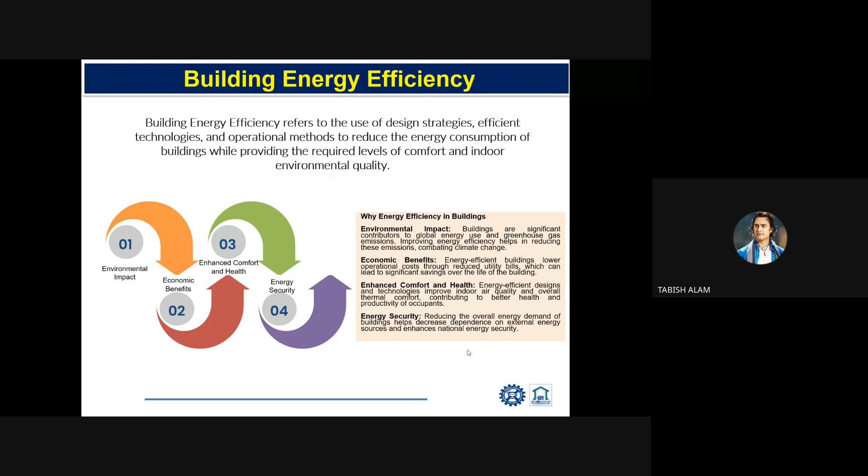The fourth one is energy security, which relates to the overall energy demand of the building, helps decrease dependence on external energy sources and enhances national energy security. That is, how we are taking energy from the external source, how we can generate energy in the building, and utilize the same. So these are the four parameters which are very important to consider in designing buildings.

So you can see in residential buildings there is a 5% increment. In commercial and commercial office there is 8% in energy consumption. In hospitality, like hospitals and hotels, there is a 10% rise. So these are the trends. Day by day we are constructing more and more buildings, so this trend is going to increase.

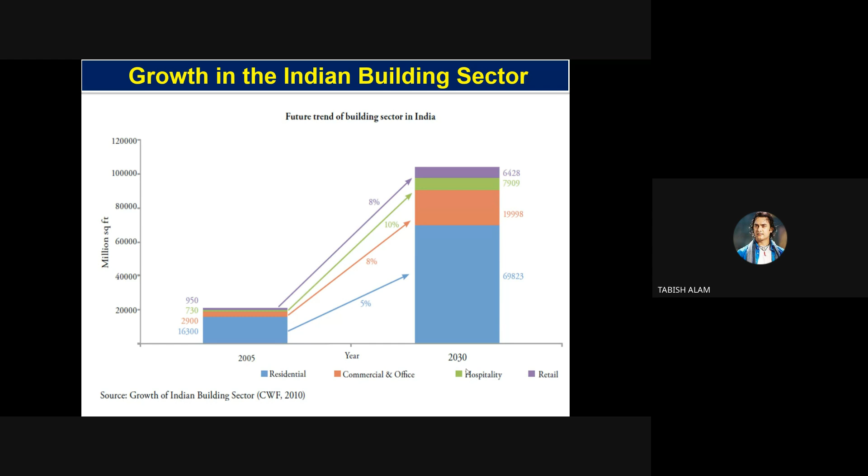So basically, what we have to consider for designing the building is that it should have low energy or be a net zero building. So first, we will try to reduce the heating demand, reduce the cooling demand, reduce the energy use of the lighting, reduce the energy use for heating water, good housekeeping and people solutions, reducing the energy requirement for ventilation. These are some parameters which can help us to reduce the energy consumption in the building.

So heating demand: how we can reduce the heating demand, how we can reduce the cooling demand, how we can reduce the energy for the lighting, how we can reduce the energy for heating water. So these are some passive measures that we can implement in the design of the building. This can reduce up to 40% of the energy demand by using these parameters.

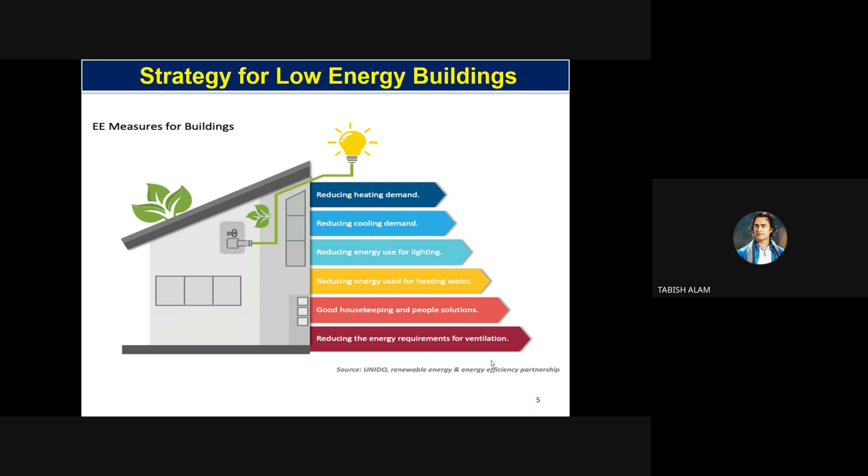So in the next slide, we can see that energy efficiency mainly depends on passive technology and active technology. In passive technology, we have shown in the previous slide that most of the parameters are passive and can be considered in the design of the building. Passive, like the building envelope, should be such that it cannot transfer heat from the building to outside or outside energy into the building. The passive term refers to the isolation of the building from the external environment, so energy does not escape from the building to the outer environment or from the outer environment to the building.

And active technology involves using energy to save energy, such as through mechanical systems, technology-driven solutions, or integration of renewable energy. In active technology there is other equipment like efficient HVAC systems, efficient lighting systems, other efficient systems, and the energy management system in the building. So these are the active systems.

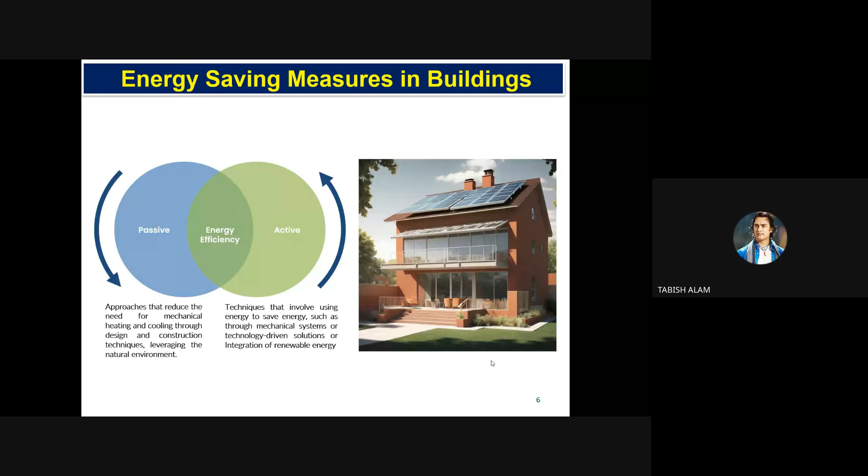So we can see the energy saving measures in the building. In the energy saving techniques, the building envelope design is the most important. We have to isolate the indoor environment of the building from the outside, so there is proper insulation in the walling and roofing so energy does not escape from the building to outside and outside energy into the building. Second one is the heat storage system. Whatever heat we are generating in the building can be stored, and used when we have no energy. Then lighting design: the lighting design should be such that we can use natural daylight in the daytime. So these are the passive technologies where we can reduce the energy demand of the building.

Other parameters for passive sustainable design are the building geometry, natural lighting, natural ventilation. Apart from this, cool roof, orientation of the building, window sizing, window orientation, whether we have to put the window on the north side, south side, east side, or the west side. These are the critical parameters which can reduce the energy demand of the building.

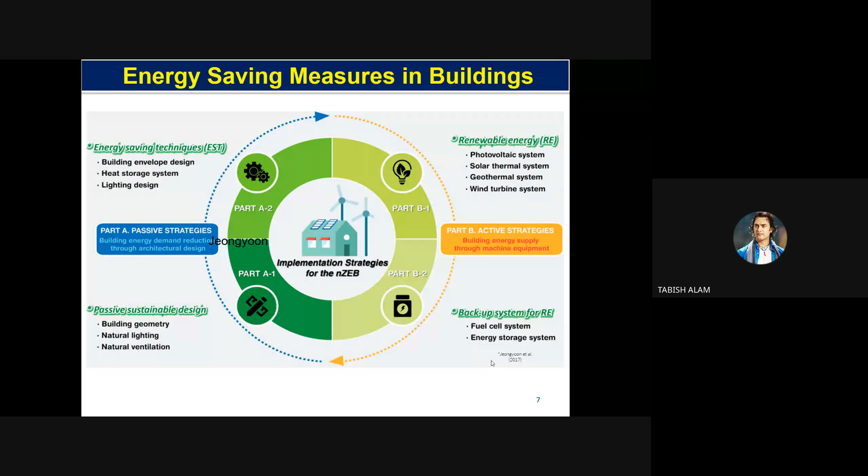Now the active strategies that can be integrated into the building, like photovoltaic systems that generate electricity utilizing solar energy, or solar thermal systems that use energy from the sun, geothermal, wind turbines. These are active technologies. And fuel cells that can be used to power the building, and energy storage systems. These come into the category of active strategies. So basically, the terms that are now coming into the news a lot: green building, net zero building, net positive building.

These are similar but there is a slight difference. A green building achieves balance between the energy it consumes and produces, resulting in net zero energy efficient and renewable energy building. Green buildings produce some energy using solar technology, wind technology, biomass, and also implement passive parameters into the building design.

A green building may be of two types: net zero building or net positive building. Net zero buildings are those which generate the same amount of energy which is utilized in the same building. So what we produce, we utilize in the same building.

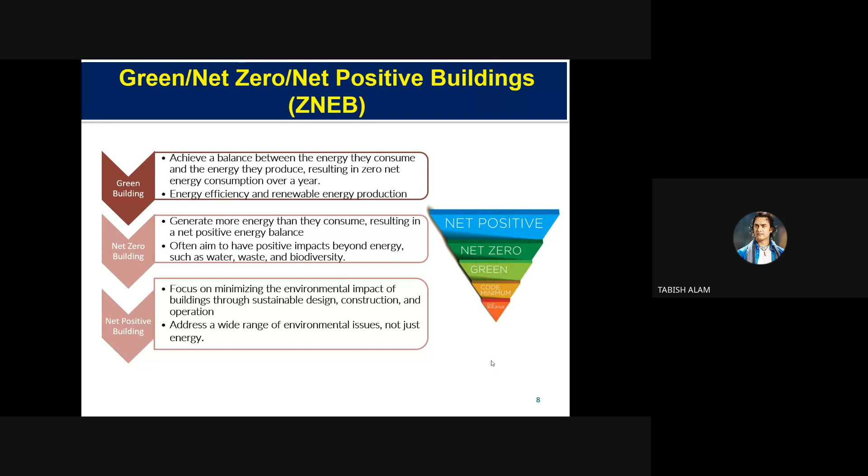Net positive means the energy produced is more than what is required in the building. Suppose consumption in the building is 100 watts, so we are producing 150 watts - producing more than the consumption. These are net positive buildings.

Now there are various parameters considered in designing a building. The first category is passive strategies. There are a number of parameters considered in designing the building. First is building massing, which can absorb solar radiation and not pass it to the indoor environment, thereby keeping the building cool. Solar energy does not enter the building, and a lot of energy can be absorbed in the walling also.

Solar orientation plays a very important role in designing a building. It involves designing the orientation of the windows so there is no direct sun radiation, which is important in summer when energy enters the building, but the same window orientation is desirable in winter when we need solar radiation into the building. Third is the building envelope.

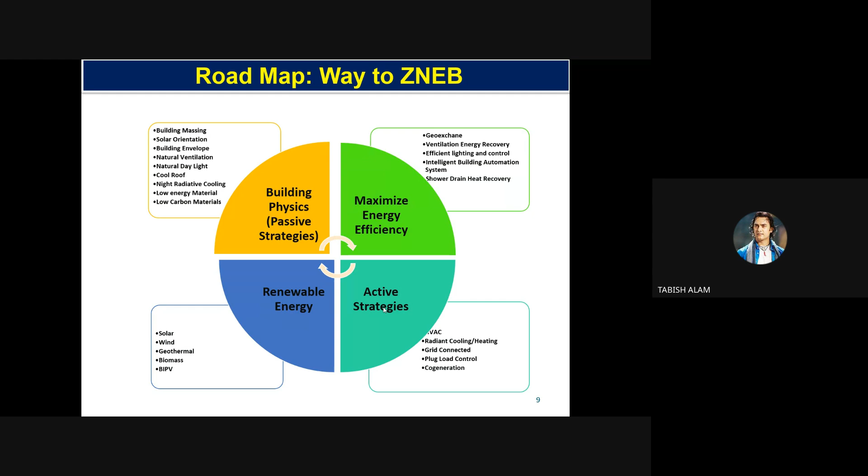These are the most efficient systems which can reduce energy consumption, and after that we can use active strategies for the remaining energy consumption: HVAC, radiant cooling and heating, grid connection, plug load control, and cogeneration.

In the passive strategies, we discussed passive solar design, orientation, window placement, and shading. Orientation we have discussed. Window placement is one of the most important parameters which can allow solar radiation to enter the building. The window should be designed so that it does not allow heat to enter the building, but it can allow natural daylight.

That is the most important. The third one is the shading device. That shading device can be used to reduce the direct solar radiation into the building.

Now the building envelope insulation, air tightness, double or triple glazing can be used for natural daylight, natural ventilation, cross ventilation, stack ventilation, ventilation tower. These are the ventilation strategies to be adopted into the building to reduce the heating or cooling load.

Thermal mass material selection is the most important. Floor and wall design, shape and layout of the building also plays an important role. Compact design should be there.

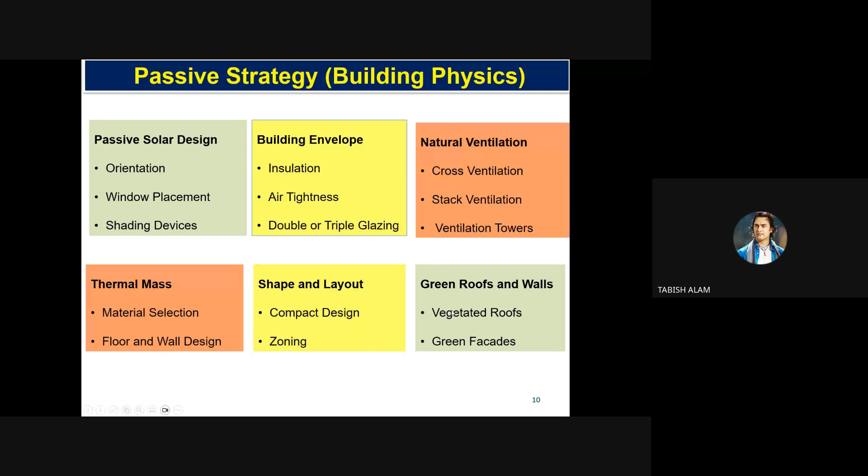Green roof walls - that is the vegetated roof, green facades. Other technology such as cool roof or reflective layer on the roof can reflect the solar radiation. So these are some strategies shown in this picture.

In the passive house there is a double or triple window which can allow visible light into the building but heat cannot cross this window. There is thermal insulation on the wall so it does not allow heat from outside to inside, or inside heat to the outside.

So these strategies can reduce the energy consumption into the building.

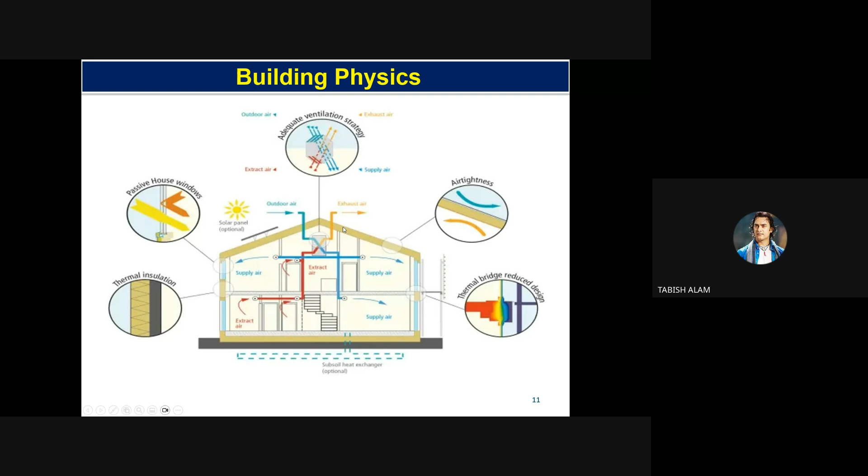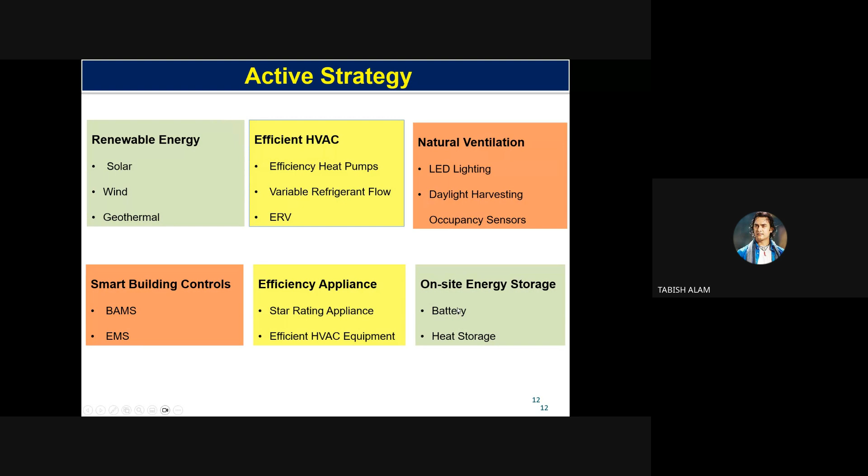There are also energy appliances that can be used, like efficient 5-star ACs, efficient HVAC equipment, and there is an option in active strategies for on-site energy storage in batteries or heat storage, so we can use this energy into the building when there are no other sources available.

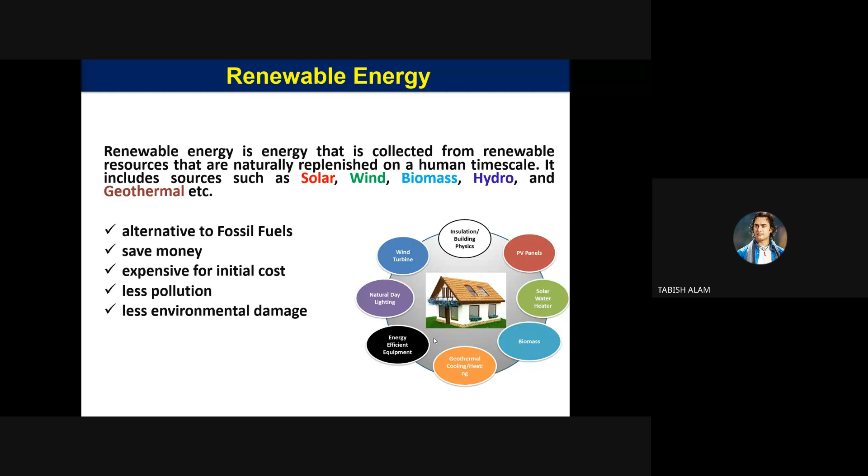So by considering all the parameters like building physics, passive parameters, active parameters, we can design a building that will be a net zero building, or even a net positive building, so we do not require any energy from the outside. What we are generating, we can use the same amount of energy.

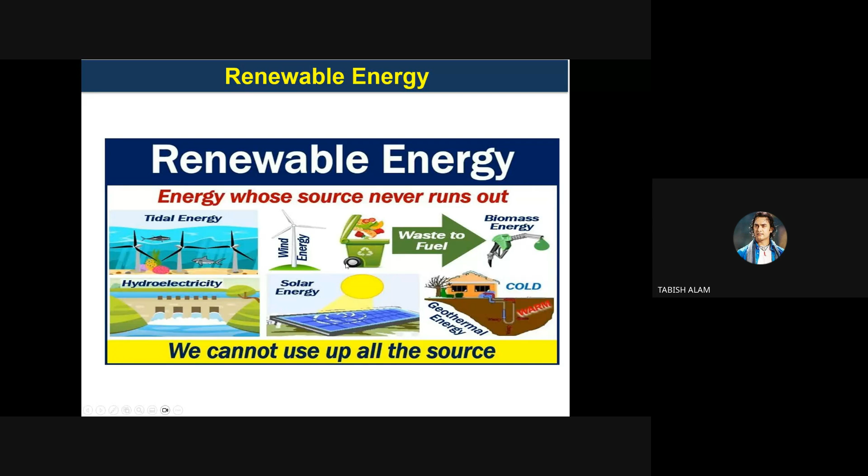So there is more renewable energy coming into the market: tidal energy, hydroelectric, solar energy, biomass, geothermal, ocean energy, biogas. So these are the ones that can be renewed at any time.

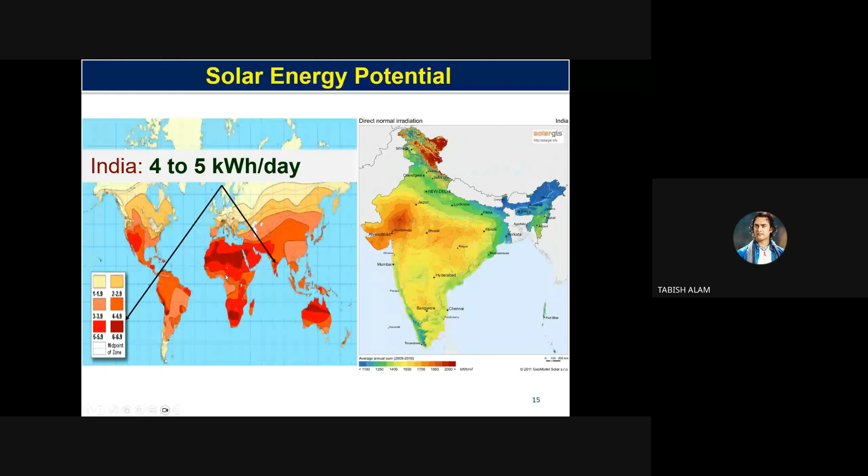So basically, the solar energy in a building can be used in two different ways. It can be harnessed by a variety of uses, including electricity generation that can be used for providing light, comfort, air conditioning, heating, cooling. The other form of energy is solar thermal energy, that can be used for heating, cooling, water heating, cooking. So we can see that solar photovoltaic can generate electricity directly, and solar thermal energy can be used for various purposes using the generated thermal energy.

Although photovoltaic can generate electricity, its efficiency is too low. But on the other way, solar thermal systems are more efficient than photovoltaic. The efficiency of the solar thermal system is approximately 60%. But we are depending on the photovoltaic system, although the efficiency is too low, because it is generating high grade energy.

So this solar power generation can be used in two different ways: one is off grid, one is on grid. In the off grid system, this is independent of the grid system, so we do not require any grid. We have the panel, we have the inverter, we have the battery bank. Whatever energy we are generating, we can store into the battery and we are utilizing it in the building.

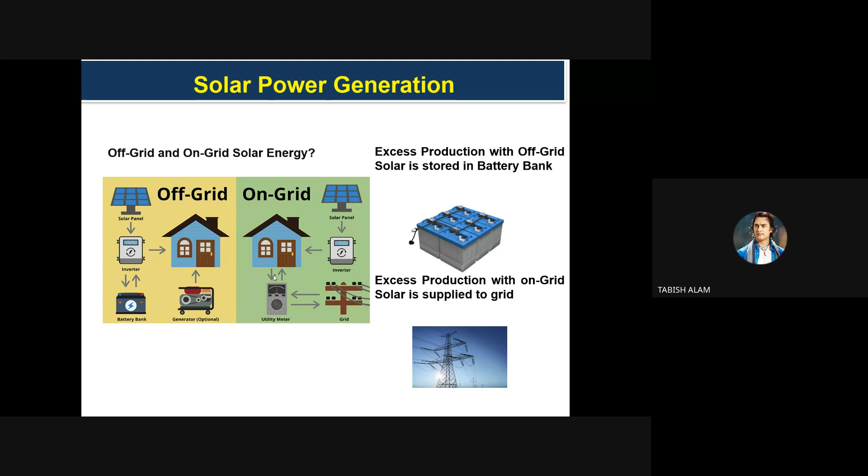So basically, I would like to talk about the solar thermal system, which is not as widely used in comparison to the photovoltaic collector, but the efficiency is high. The first one is the solar thermal collector, that uses solar energy and converts it into heat. The solar thermal collector, basically a flat plate collector, has four major components: absorber, glass, housing, and piping. In the piping there is water flowing, and we have an absorber.

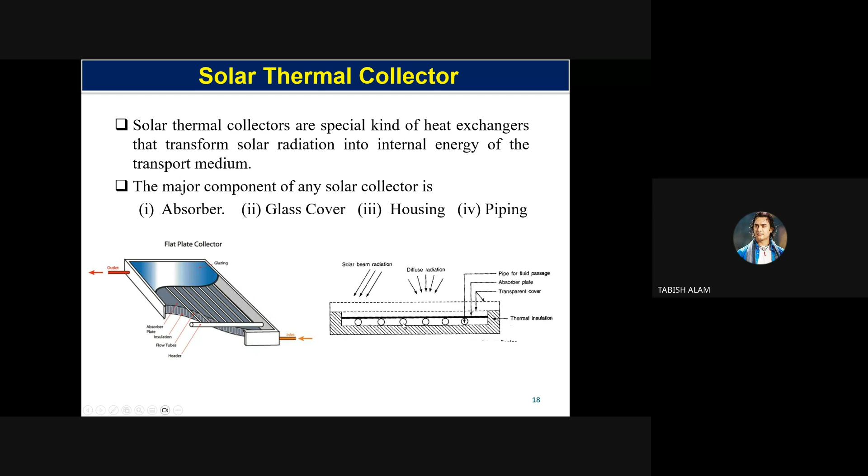This is the absorber and this is the glass cover. So when solar radiation falls on the absorber, it gets heated, and below there is a piping system in which the water is flowing, so we can get hot water.

So these are the basic diagrams to show what is the energy loss and what is the energy gain in this. We can see that the energy input into the flat solar thermal collector is the direct radiation and diffuse radiation.

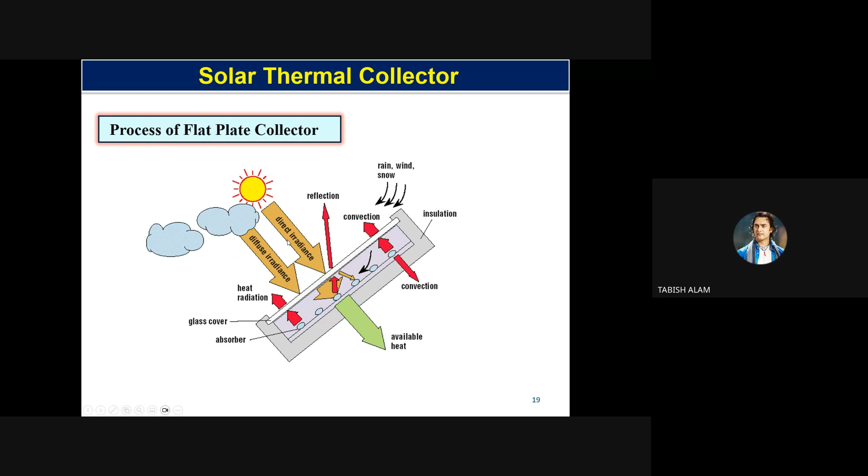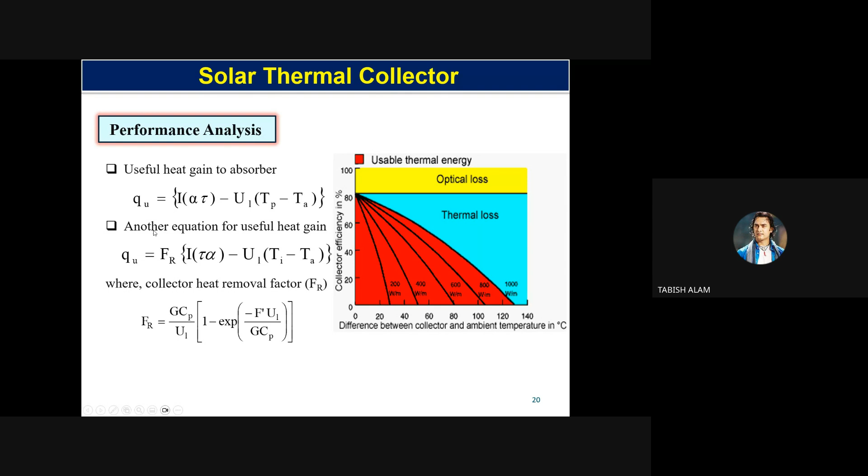This is the optical loss. So these are some equations to calculate the useful heat gain into the water. So the thermal efficiency is the useful heat gain upon the solar radiation incident. So we have to remove the heat losses from the heat gain, in which the parameter overall heat loss is most important.

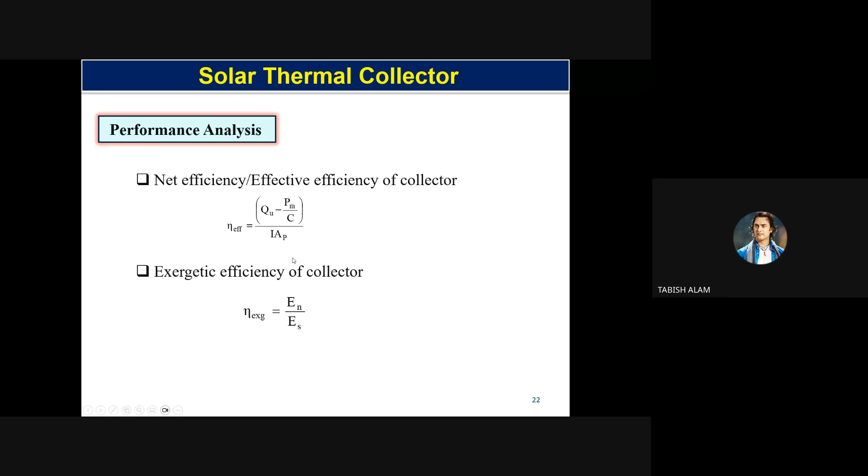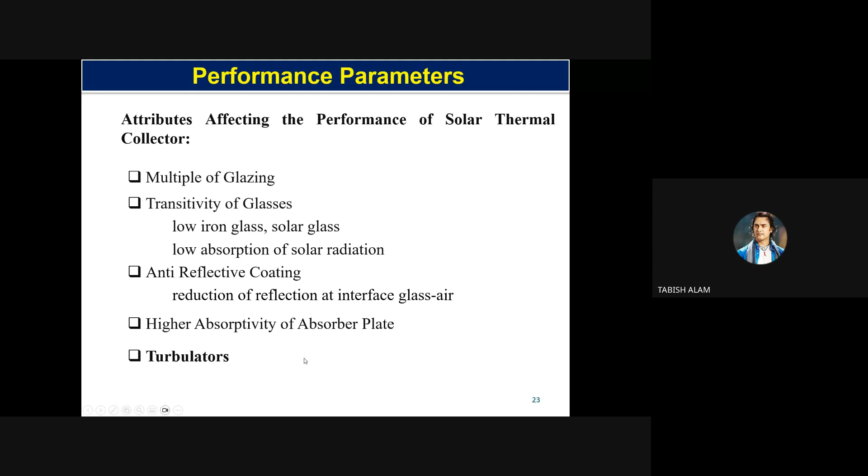So basically, what are the important parameters that can affect the performance of the solar collector? First one is the glazing, transmittivity of the glasses, low iron glass, solar glass, low absorption of the solar radiation, anti-reflective coating to reduce the reflection at the glass-air interface, high absorptivity of the absorber, and the last one is generating turbulence into the flow that can enhance the convective heat transfer coefficient from the absorber plate.

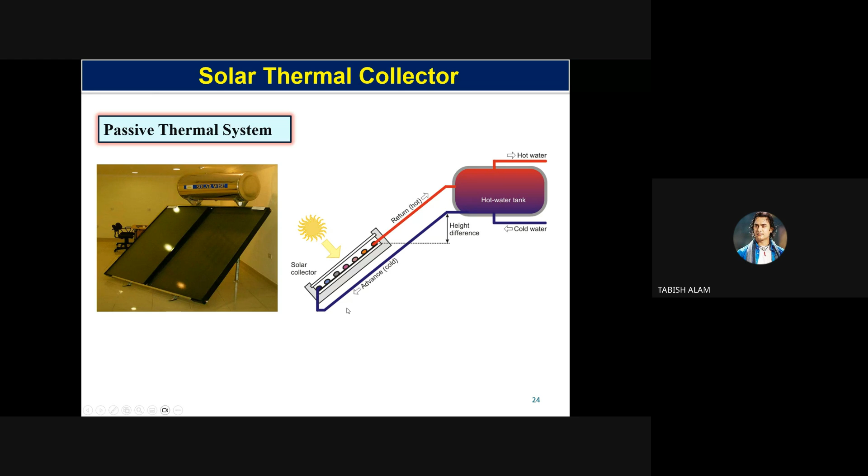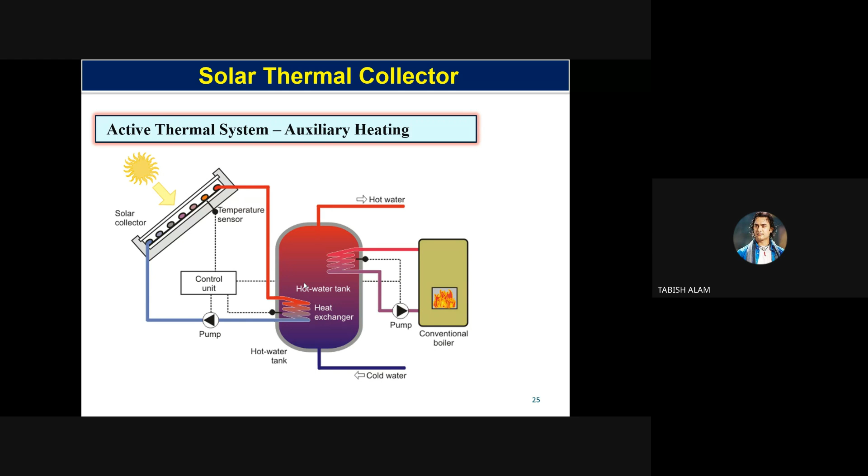Active thermal system is the thermal system in which we have to provide external energy to operate it. So in this we are providing electric energy to the pump so it can circulate the water, and we have the auxiliary heater so it can provide the heat when there is no solar radiation. So these basic two types of solar thermal collector are available. This is one example of the active thermal system, like a solar twin system.

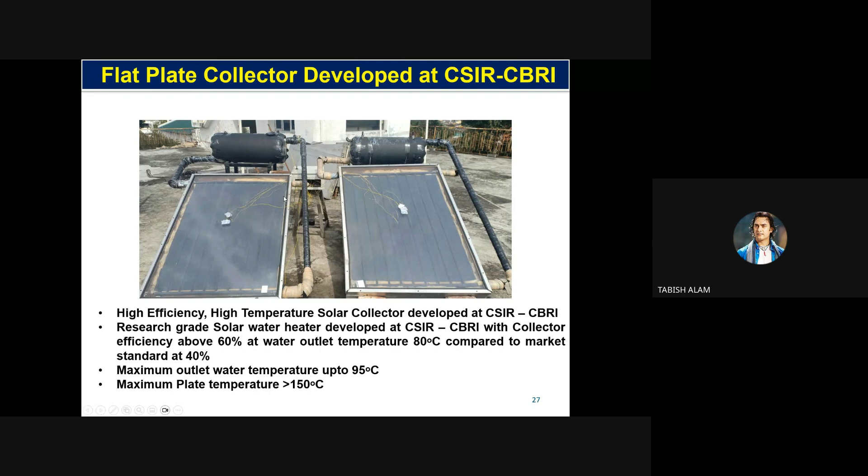So basically, I would like to show the system we have developed at Central Building Research Institute. We have developed the flat plate collector with efficiency above 60%, and the maximum water outlet temperature is up to 95, and the maximum plate temperature is 150. This thermal collector is designed and tested in the outdoor condition of Roorkee.

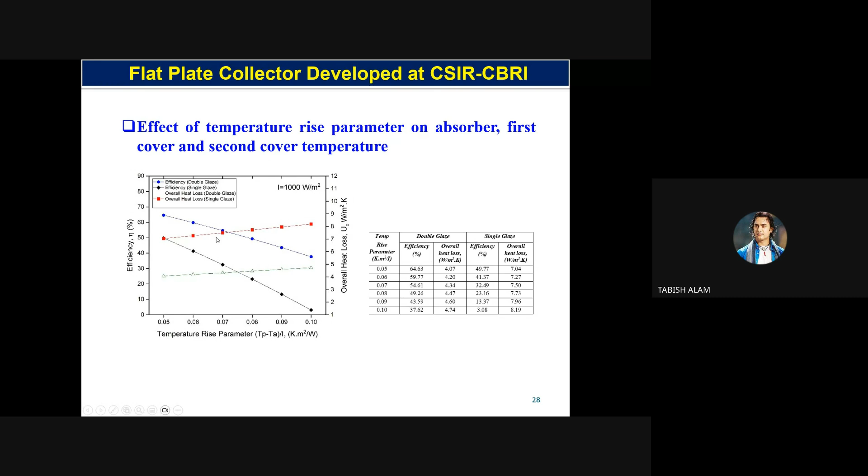So these graphs show the effect of the temperature rise parameter on the efficiency. These are the comparison of the single glazing and the double glazing. In this graph, we can see the efficiency decreases with temperature rise parameter, but the efficiency of the double glaze is much higher in comparison to the single glaze. And we can see the heat losses for the single glaze are too high. So high heat loss through the glass cover means low efficiency. So these are some data we have shown here.

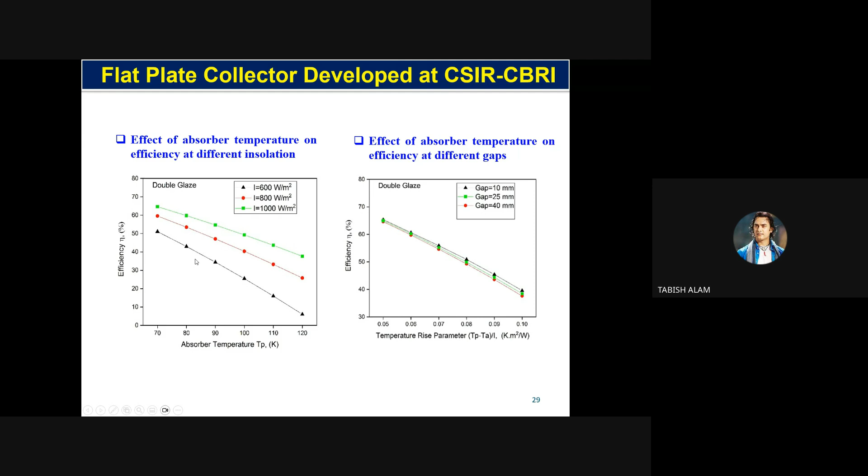So the other is the vacuum flat plate collector. Vacuum plate collector is the most important, because in the flat plate collector, most of the energy is wasted through the top glass cover by natural convection. So in the vacuum flat plate collector, there is no air, there is a vacuum in the whole enclosure, and there is a flat plate. When there is no air, there is no natural convection, because natural convection is responsible for the heat loss. So no air, no natural convection, so efficiency is high.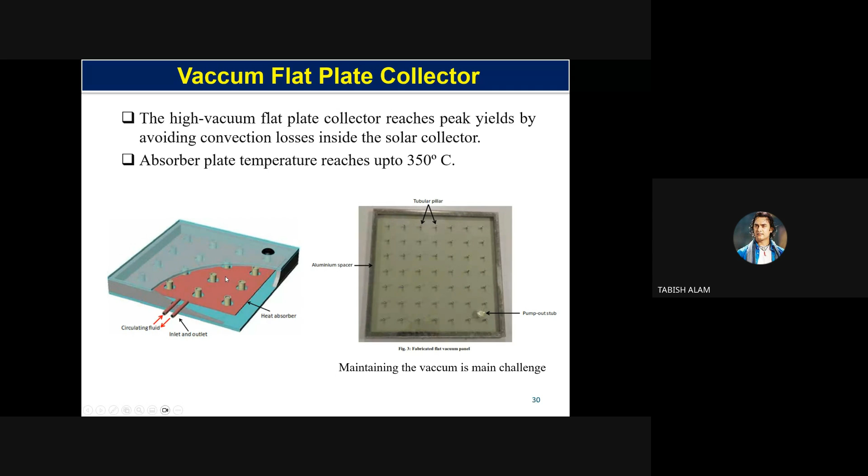So the temperature of this plate reaches up to 350 degree. But in the previous system, we have seen that the temperature of the flat plate reaches up to 150 degree. So we can see the advantage of this vacuum. We are reaching the temperature up to 350 degree.

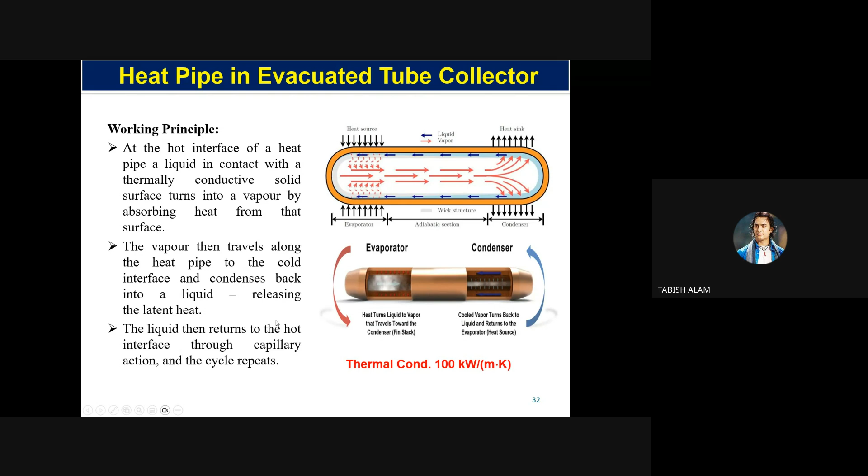So basically heat pipe is like a tube where we can put one end at the hot source, and the other at the heat sink. So it can transfer heat from hot source to heat sinks. So the basic working principle is that the vapor travels along the heat pipe into the cold interface and condenses back into the liquid, releasing the latent heat. Then this liquid is returned to the hot interface through the capillary action. You can see here. So through the capillary action, this cycle is repeated many times.

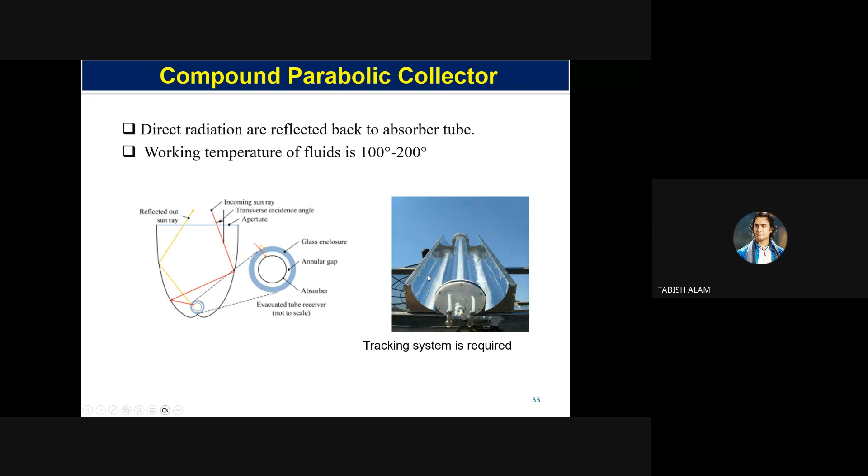So another, this parabolic collector is like a compound parabolic collector that uses the direct radiation that is reflected back to the absorber tube. The working temperature of this absorber is 100 to 200. So the advantage of this is it is the basic evacuated tube collector in which the reflector is placed, so it can utilize direct radiation as well as the reflected radiation from this reflector.

So this is one of the most important, and we are working on the PVT collector, photovoltaic thermal collector. So we have seen there are a number of thermal collectors. With the help of the thermal collector, we can generate the thermal energy. But PVT collector is one of the systems that can generate the electricity as well as the thermal energy. So photovoltaic thermal collector, sometimes known as the hybrid PVT system, is a system that converts the solar radiation into thermal and electrical energy.

This system combines a solar cell, which converts the solar light into electricity, with the solar thermal collector. So actually, the other purpose is to cool the PV cell by removing the heat from the cell by using the thermal absorber. So it serves two purposes. One, it can generate the electricity as well as the thermal energy, and also by removing the heat from the PV cell, the efficiency of the PV cell increases, because at higher temperature of the PV cell, the efficiency decreases. So we are improving the efficiency of the PV cell. Simultaneously, we are working to generate the thermal energy.

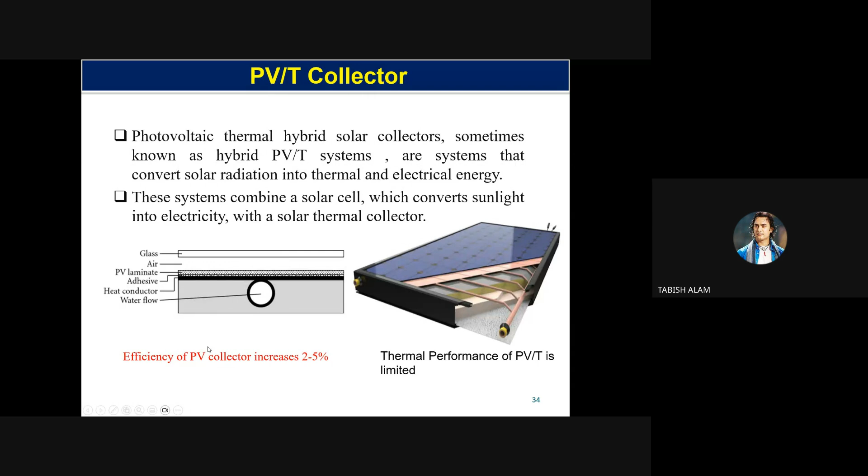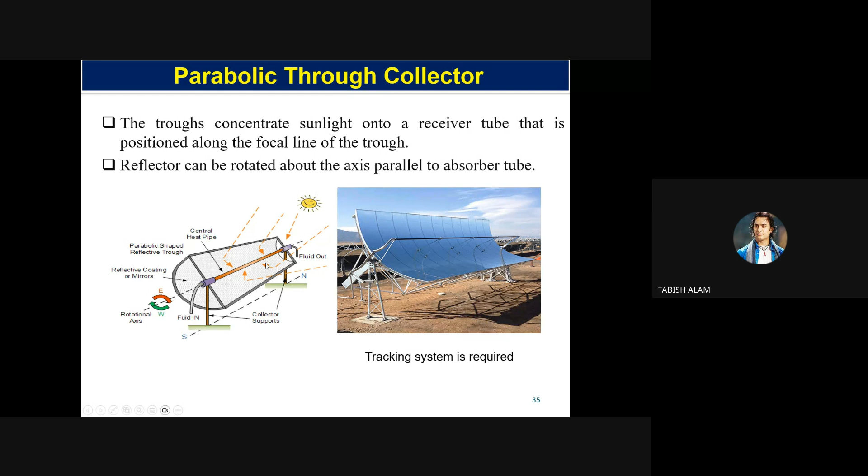So this is another type of thermal collector, parabolic trough collector. In this concentrated thermal collector, it increases the solar radiation intensity on the evacuated tube absorber. So it reflects the sun radiation onto the absorber, and thereby it is using a large amount of the solar radiation. So generally this is used for high power plants, solar energy power plants.

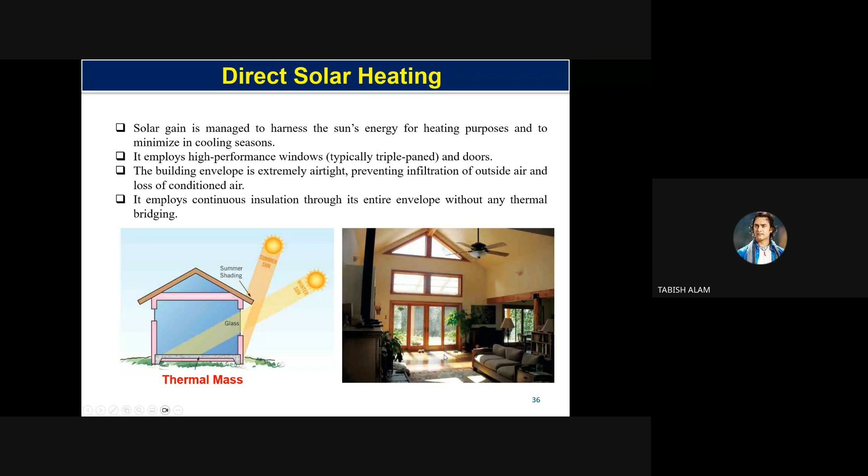So the direct solar heat enters into the building and can be used by using the thermal mass. So the solar gain is managed to harness the sun's energy for heating purposes and to minimize the cooling season. That is very useful in the Leh Ladakh region, and this is a very popular technology which is being used in Leh Ladakh. So there is a large window, so direct sun rays enter into the building, and there is a thermal mass in the floor. So energy is stored in this thermal mass in the daytime, and in the night time it releases the energy into the room.

So indirect solar heating, which can be used in the building: we have a solar panel, we are storing the heat into the tank, so we can use it in the night time.

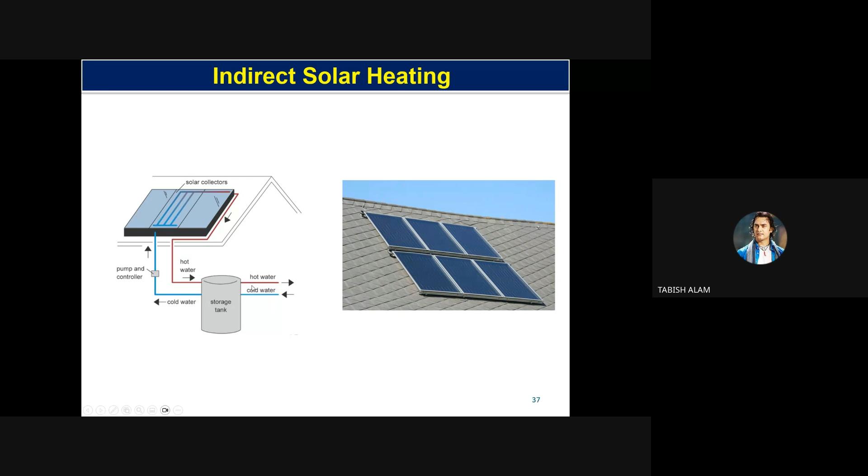So this is one of the important technologies that we are working on in CBRI: indirect solar heating, using solar heating and solar cooling through radiant heating. So basically, radiant heating. The fundamental concept behind this is that when there is a temperature difference, heat is transferred from high temperature to low temperature.

So in this cooling or heating system, we have the panel on the roof or the sidewall. So we have to cool or heat the structure basically. So when the structure is cool, heat transfers from the human to this structure. So the human is being cooled. So basically there is no circulation. Only the structure in the room is being cooled.

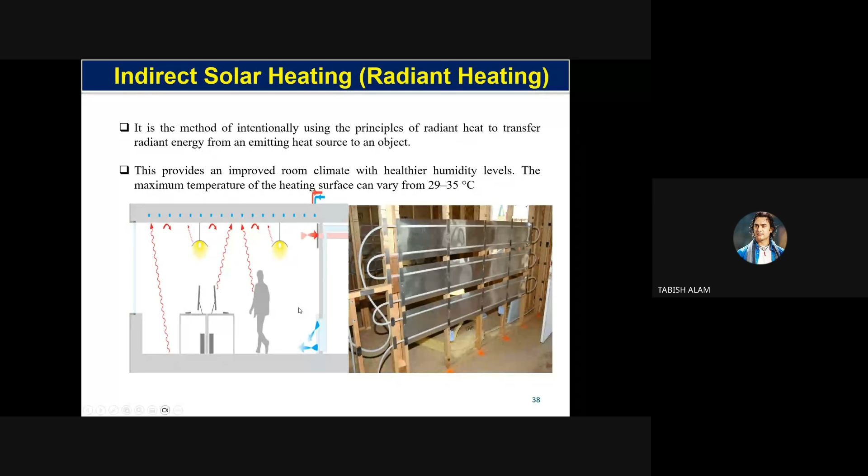So this is a very efficient technology, and no fan is required, no ventilation is required, because we are cooling or heating the building structure only. So this is one of the technologies that we worked on 5 or 6 years ago.

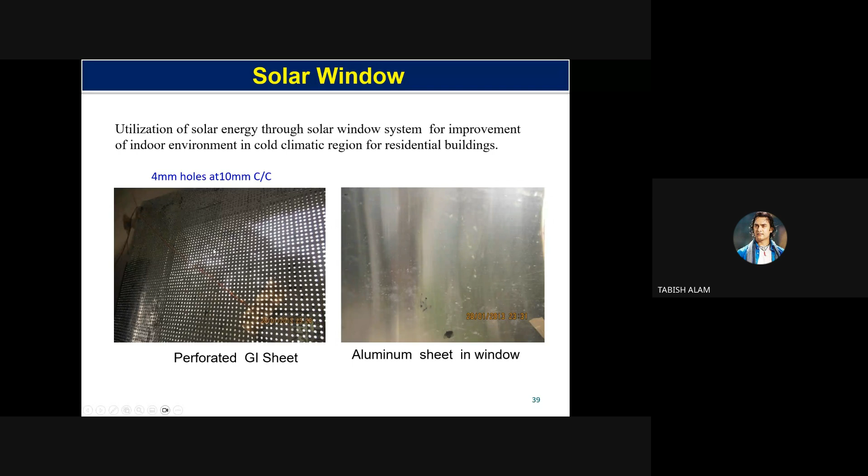So this is the solar window: utilization of solar energy through the solar window system for improvement of indoor environment in cold climate regions for residential buildings. So we have a perforated steel plate, and you can see there is a window. This perforated sheet is heated up by solar radiation, and this solar energy is released into the room. The purpose of the perforation is to maintain visible light, so natural light comes into the room.

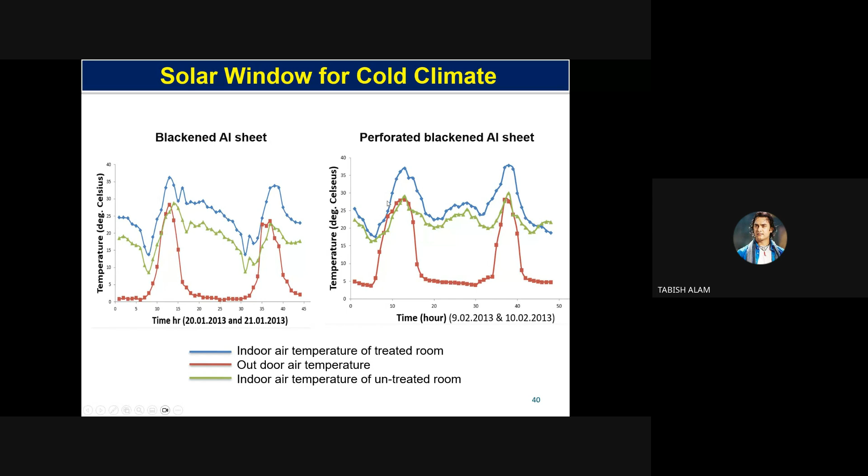So these are some graphs. We can see here that by using this solar window, the room temperature is slightly higher in comparison to the indoor temperature when we do not have these windows.

So another technology for cooling the building: besides the vapor compression cycle that we have in the AC, we can run the refrigeration system on the vapor absorption system. In this system, we can utilize waste heat, solar energy, like that. In this system we have a vapor generator, absorber, evaporator, and the condenser. So we can use the waste heat and the solar energy to release the ammonia from the ammonia solution. So in this, ammonia is used as a refrigerant.

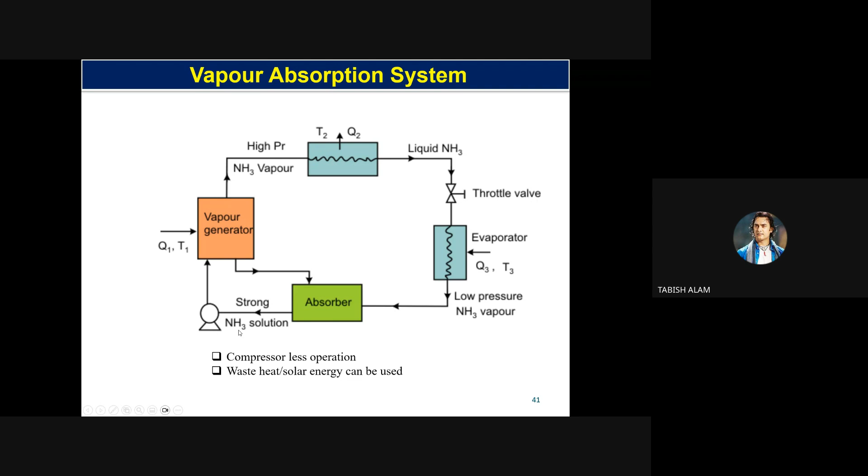So another technology for cooling the building is desiccant-based cooling. So 3 years ago we worked on this technology, in which there are three major components. One is the desiccant wheel. Second one is the indirect evaporative cooler, and one is the solar thermal collector.

Wait, I will continue. Okay, sir, no issue.

So in this technology, actually this is a solar air conditioner that is desiccant based. In this, we are using the solar thermal collector, a desiccant dehumidifier, and the indirect evaporative cooler. So in this technology, there are two streams of air. One is the ambient air going through the desiccant wheel, where we remove the water vapor. Then we have the heat recovery wheel, and we have the indirect evaporative cooler. Indirect evaporative is like a desert cooler, but in this evaporative cooler no humidification takes place. So there is a separate stream.

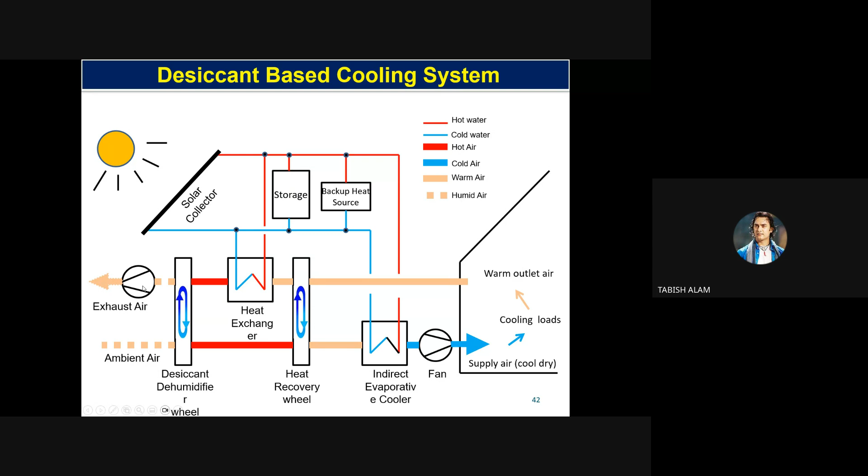And when the air from the conditioned space is going to the environment, it goes through the recovery wheel, a heat exchanger, where we heat this air, and we pass this hot air through the desiccant wheel. So whatever amount of water vapor is absorbed from this stream can be extracted by this hot air stream. This heat is generated by the solar thermal collector. So this is the basic concept.

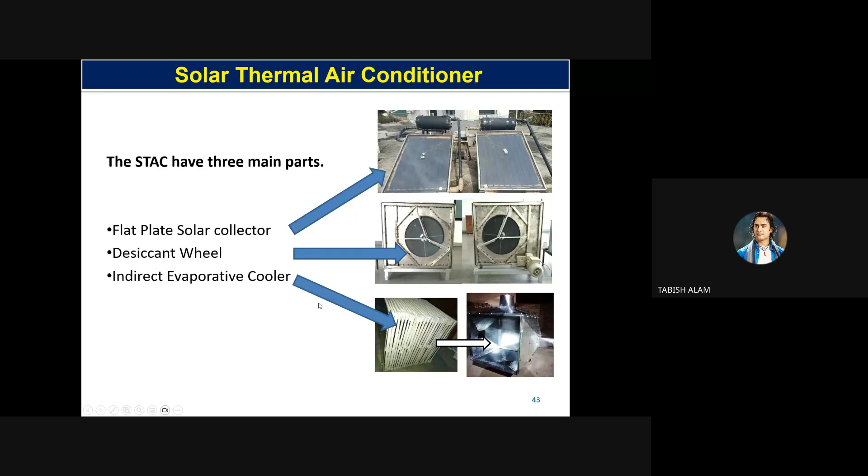So basically, what is the desiccant? A desiccant is a chemical composition that is used for absorbing the moisture present in the air: remove the moisture, reduce humidity, improve air quality.

So basically the desiccant absorbs the humidity from the air, and then hot air supplied to the desiccant removes the water vapor from the desiccant. So basically the desiccant material is silica gel; that is the best desiccant material.

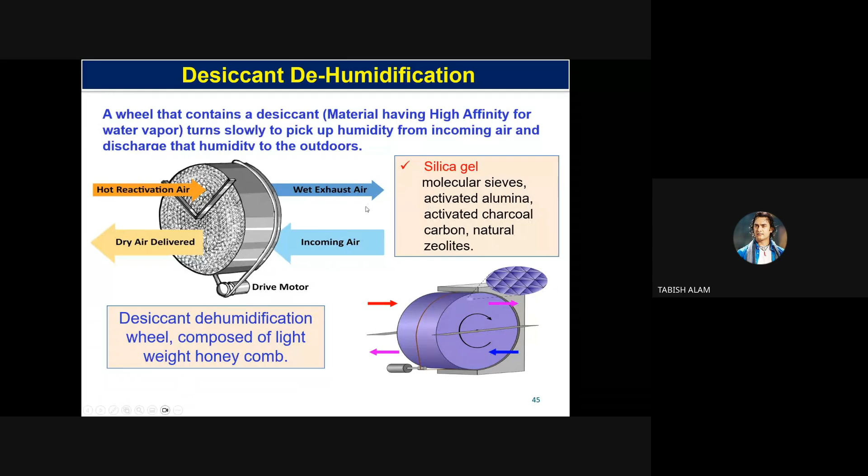So these are the basic concepts. So silica gel and molecular sieves we have used. Other desiccant materials are activated alumina, activated charcoal, carbon, and natural zeolite.

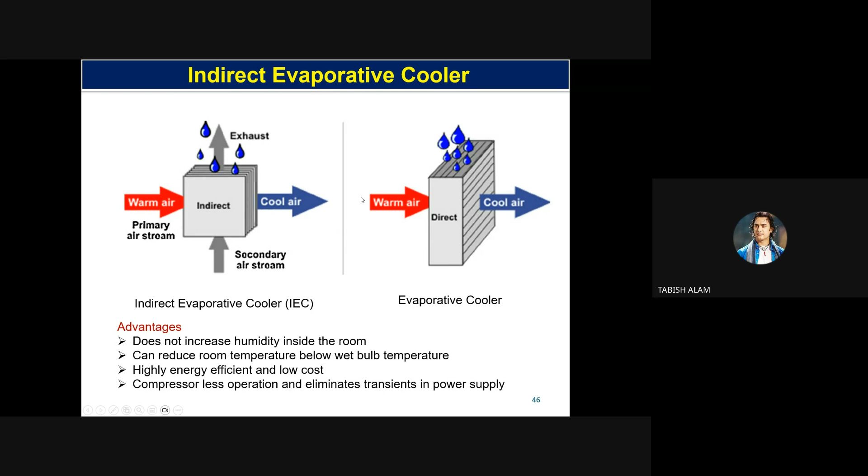So these are the advantages: it does not increase the humidity inside the room, can reduce the room temperature below the wet bulb temperature, is highly energy efficient and low cost. There is no compressor, so it is energy efficient.

This is one of the applications of the solar air heater in the building, for the heating purpose. We can use this solar air heater for drying crops like this. Drying is a water removal process from foodstuff, commonly used for preservation and storage purposes.

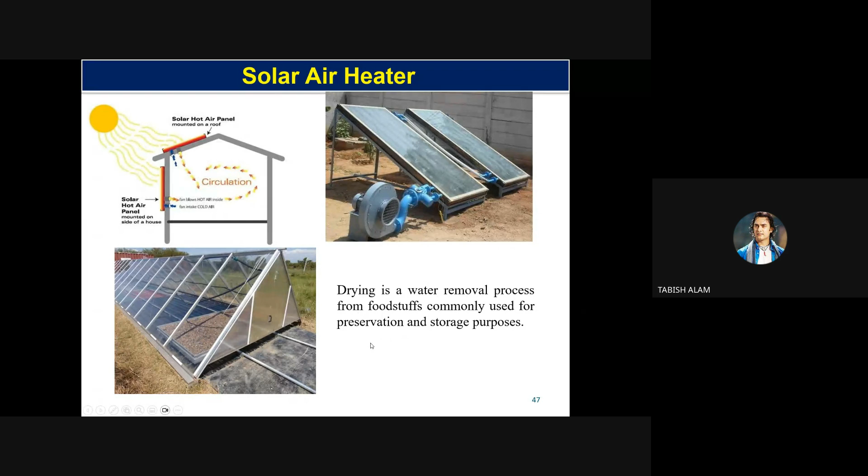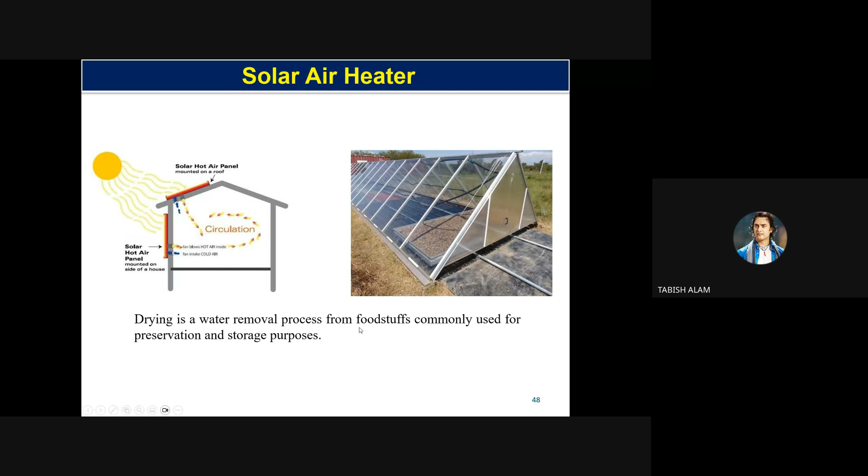So these are the things we have worked on. Solar air heater drying is a water removal process from foodstuff commonly used for preservation and storage. So we have also worked on the solar air heater. There are several components of the solar air heater. First one is the absorber plate. There is a glass cover and back insulation.

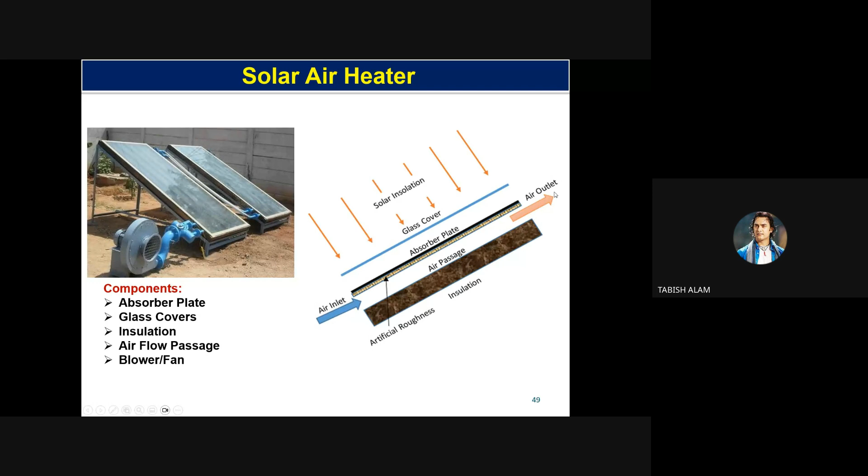The solar radiation falls on the absorber plate through the glass cover. So when the air comes in contact with this hot absorber plate, it transfers the heat to the air and the temperature of the air rises. There is a blower that sucks the air passing through this air duct.

Another technology was developed at CBRI approximately 20 years ago. The solar cooker has an insulated box, a double layer glass, and a reflector. It can cook two items at a time like dal and rice.

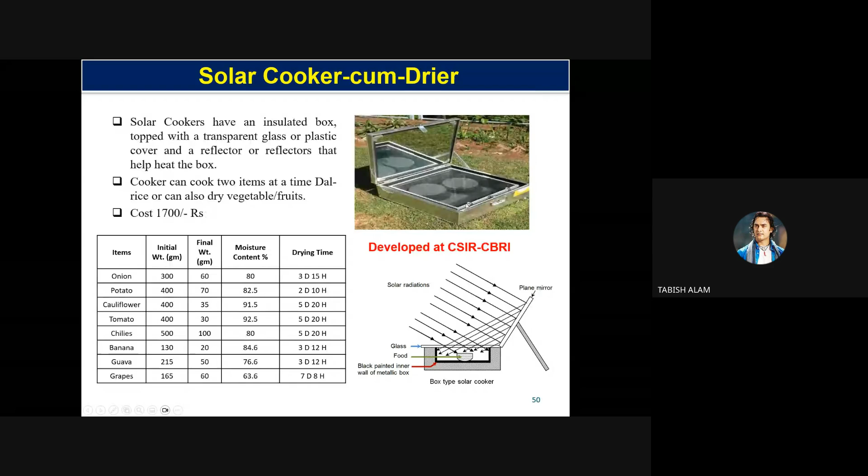So these are some data. It can also be used for drying. So this is a very simple solar cooker. It is available in the market, and this is developed by CBRI.

So this is a Trombe wall that can be used in the building for heating purposes. The Trombe wall can be used for ventilation as well as heating. We can see here there is an air duct and a thermal collector. This thermal collector gets heated by solar energy, and when air comes in contact with it, the temperature of the air rises.

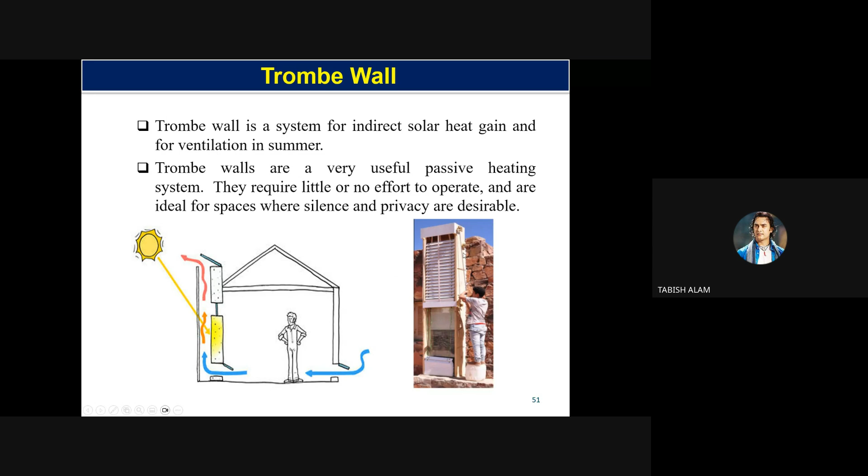Due to the density difference, it goes up. When this hot air goes up, it creates the stack effect, which sucks fresh air into the building. So these are the basic concepts being used in Leh Ladakh, and this is also used for heating the building.

So this is one of the important ones, that is the solar chimney. The solar chimney has the same purpose as the Trombe wall. The solar chimney is used for cooling the building. So in this we have an earthen channel. By using this collector or solar absorber, air is heated up and it goes up. So it creates suction, and it sucks the air from this earthen duct. So it gets cooled down, and it serves as natural ventilation and also cools the building.

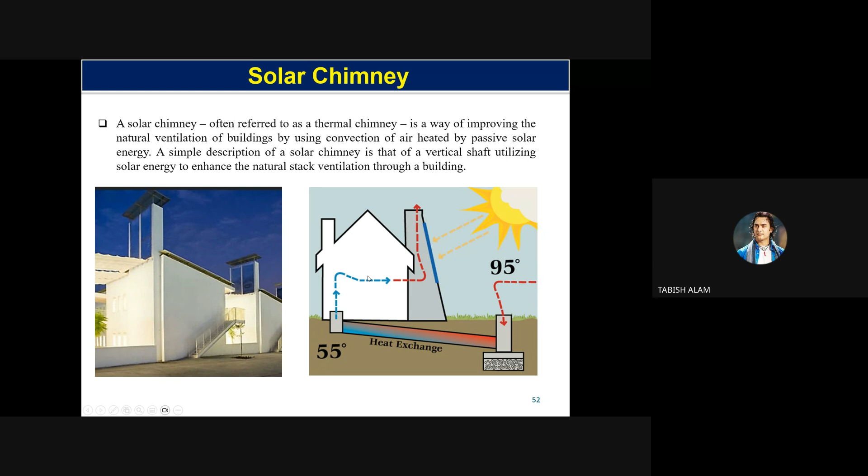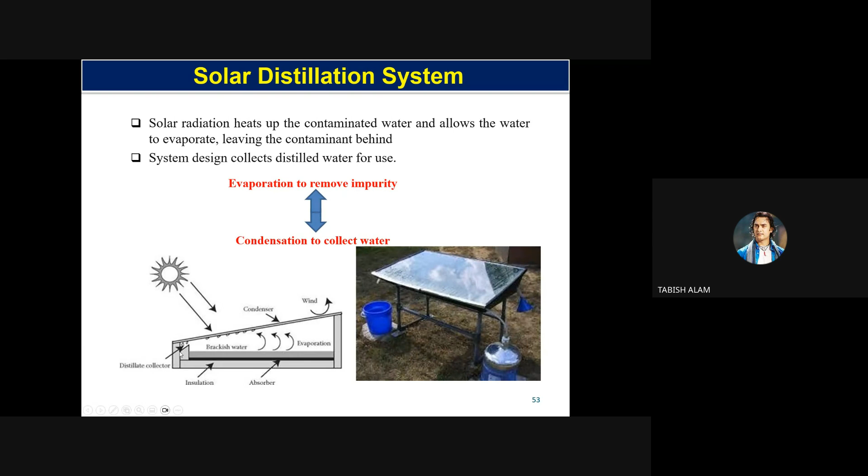This is a solar distillation system for removing contaminants from the water. Solar radiation heats up the water and allows it to evaporate, leaving the contaminants behind. This is a basic distillation system that uses solar energy to evaporate the water, and that evaporated water can be collected at the end. So we can get distilled water using this technology.

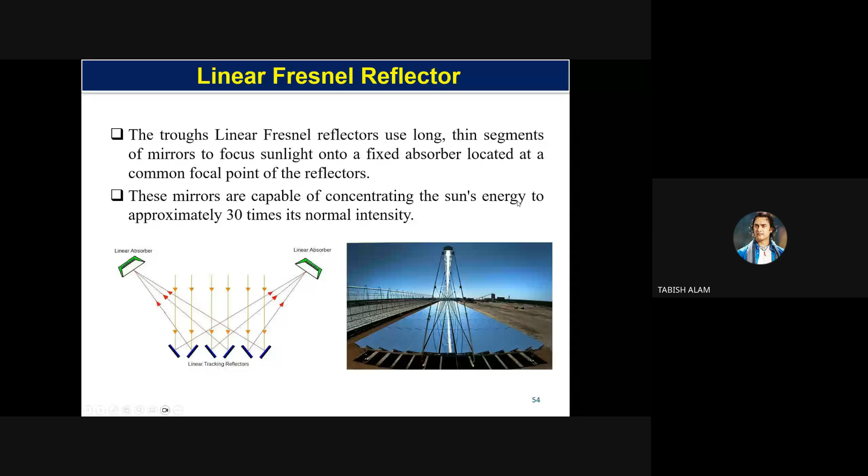The other technology uses solar energy to generate thermal energy, and that thermal energy can be used to run this solar thermal plant for generating electricity. The linear Fresnel reflector uses long thin mirror segments to focus the sunlight onto a fixed absorber located at the common focal point of the reflectors. These mirrors are capable of concentrating the sun's energy to approximately 30 times its normal intensity.

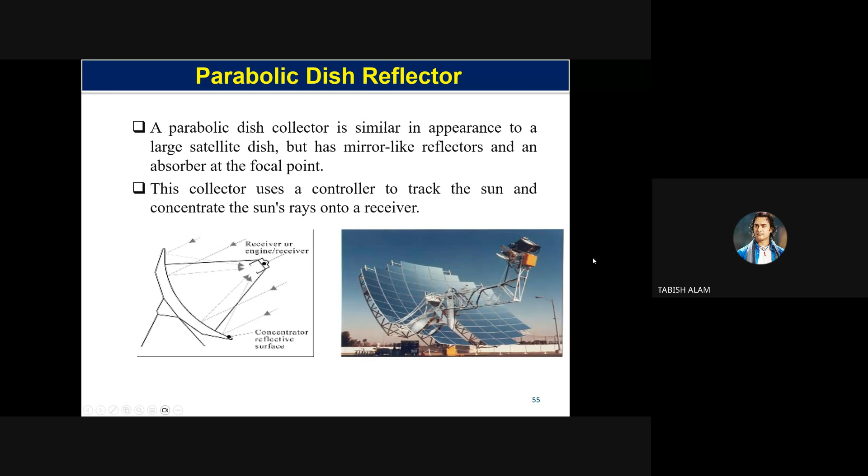So this is another type of solar thermal dish reflector, a thermal collector that can focus the sun's radiation on a particular receiver. So it generates a temperature of approximately more than 500. So this energy can be used for various purposes.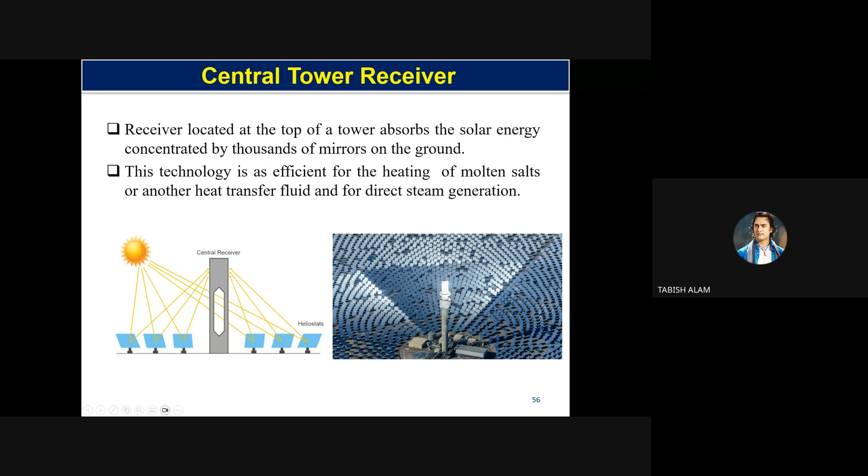So this is another type, the solar tower receiver, that can be used to generate electricity. Basically, there is a large number of reflectors which concentrate the solar radiation on a receiver. So it can generate temperatures up to 1,500. By generating this temperature, high grade thermal energy can be generated, which can be used to generate steam in the power plant.

We have seen a number of solar thermal collectors in the previous slide, and we have seen the PVT technology there. So this is one innovation that has been done by MIT. In this, you can see there is a transparent PV panel, a transparent solar cell. It has a very high application in buildings, where we can use this glass in the windows; it allows visible sunlight into the building and it also generates electricity. You can see that there is a light emitting diode.

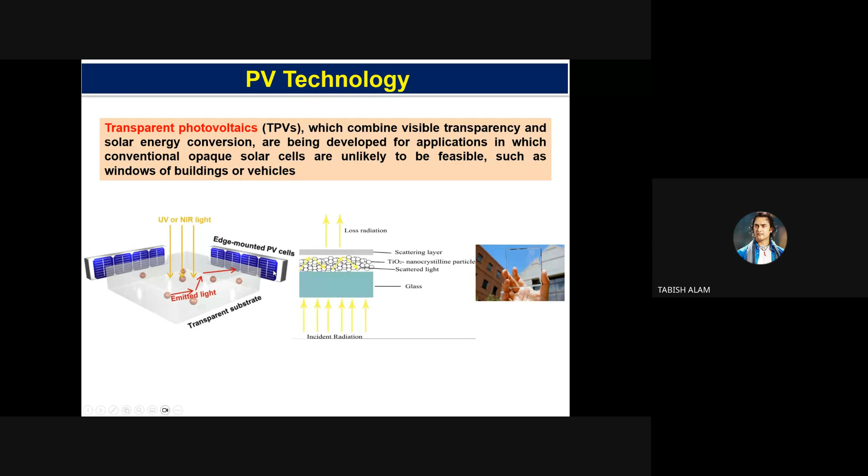So when UV or NIR light falls on this light emitting diode, it can transfer this energy to the edge mounted PV cell. So although it is transparent and generates electricity, the efficiency is too low. So work is being done on this.

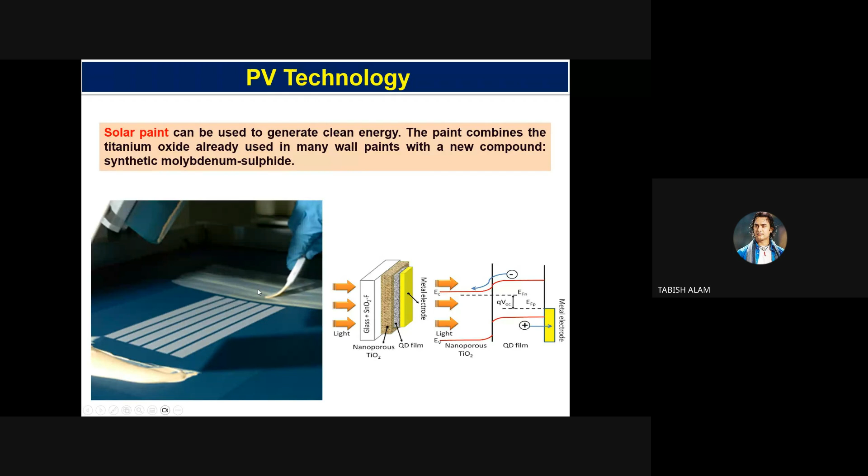So there is another innovation, solar paint, that can be used to generate clean energy. The paint combines titanium oxide, already used in many wall paints, with a new compound, synthetic molybdenum sulfide. So in this innovation, the solar cell in the form of paint can be placed on the wall or on the roof of the building and can generate electricity directly.

So this is one of the innovations done by one of the sister labs, CMERI Durgapur. They developed the solar tree. A solar tree is nothing but a structure where a number of solar panel modules are installed on a particular structure in the form of a tree. So it can save a large amount of land area. It gives 100 times more solar power compared to the conventional PV layout and consumes 1% of the land surface for the same power. So it has high applications where we have to use solar energy.

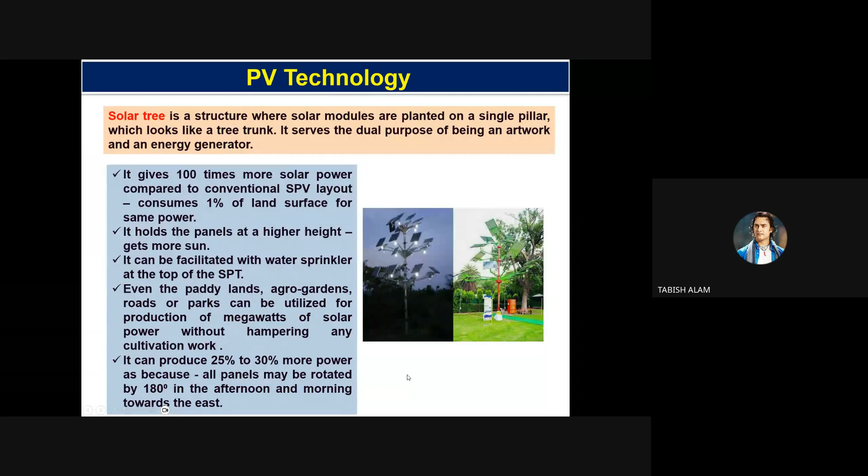This slide shows the tri-generation system. In a tri-generation system, generally we want to generate cooling, heating, and electricity simultaneously from the combustion of biomass fuel or solar heat. Trigeneration is an attractive option where we have to produce energy as well as heating or cooling, so a single system can generate electricity as well as thermal energy or cooling for a particular space.

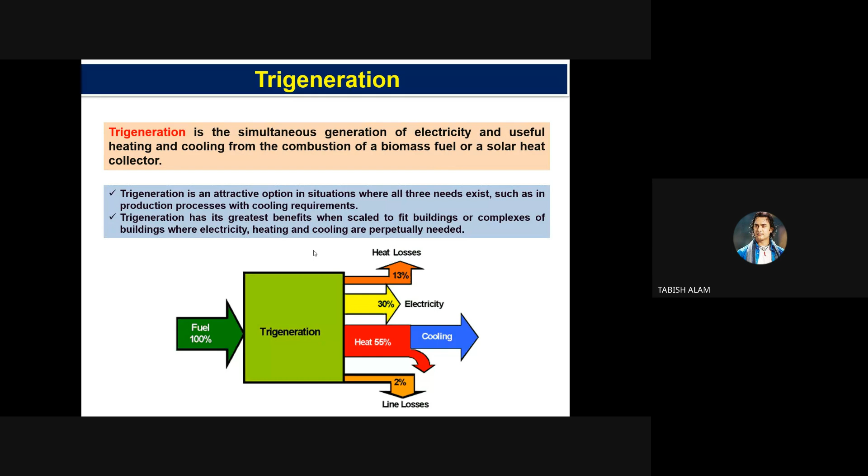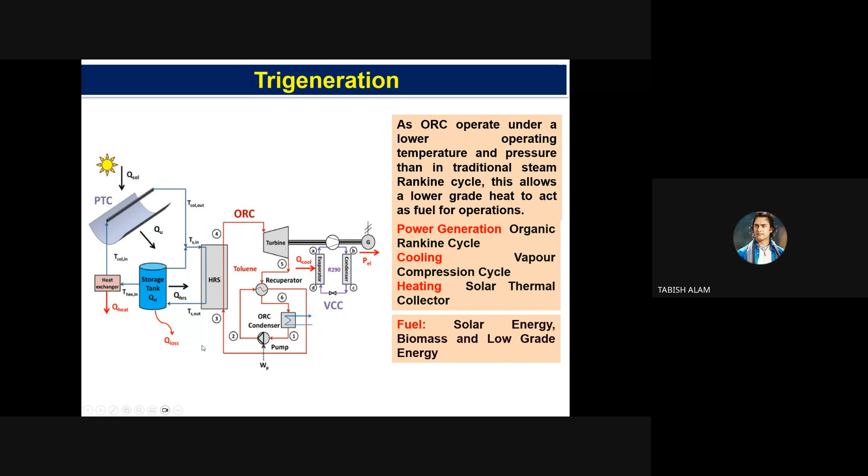This is one of the important systems of trigeneration: the organic Rankine cycle, which operates at a lower operating temperature and pressure than the traditional steam Rankine cycle. This allows lower grade heat to act as fuel. This power generation system can generate electricity by driving the turbine, and it can also generate cooling and heating. This is one of the technologies that can be used for heating and cooling the space.

Geothermal technology uses a heat pump where we exchange heat with the ground, because the ground has a consistent temperature throughout the year irrespective of weather conditions, summer or winter. The air conditioner or heat pump has a high coefficient of performance when it exchanges heat with a source that has less temperature difference. So we can utilize the consistent temperature of the land for the indoor of the building, for heating purposes as well as cooling purposes.

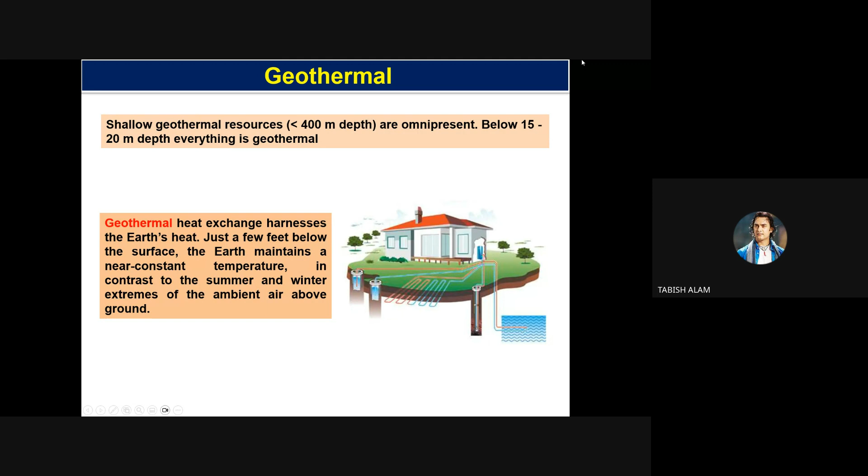But how can we say that a building is efficient or not? There are some star ratings that come for buildings, like ACs or washing machines or other small equipment. Buildings also have this star rating that depends on energy consumption.

So we will show how to rate the building, how we can say that any building is green, and what star rating it has. The star rating performance for the building is based on the actual performance of the building in terms of specific energy usage - basically kilowatt hour per square meter per year is the basic parameter based on which we can say whether a building is a green building or not.

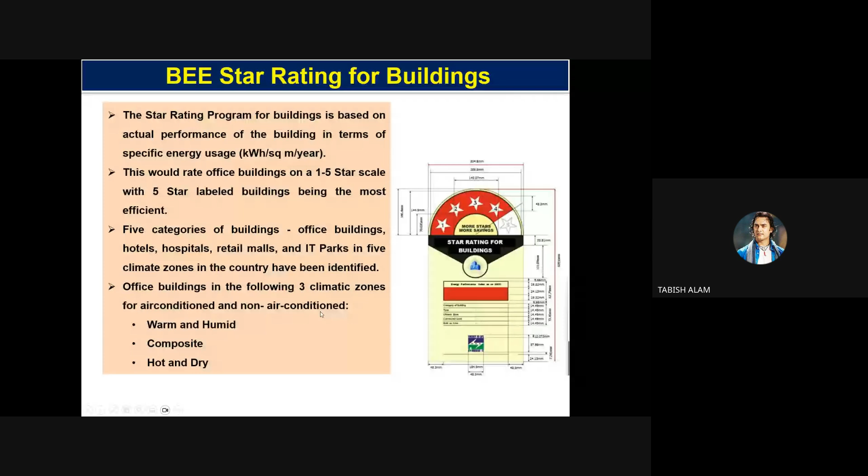The climate zones are: warm and humid, composite, hot and dry, temperate, and cold weather. So basically, for office buildings in these climate zones, for air conditioning and non-air conditioning cases, the star rating has been provided by BEE.

We can see in this slide that star rating for office buildings has been formulated in two ways: one when the building requires less than 50% air conditioning, and when it requires 50% or more air conditioning. So you can see the EPI - energy performance index - that is the kilowatt hour per square meter per year. When this value is 75 to 65, it is a 1 star building. In this way, when the EPI is lowest, below 35, it's a 5 star building. This is particularly for hot and dry climate when the air conditioning is less than 5%, or 50%.

Warm and humid in the climate zone. There is another rating when the EPI is below 45, then the 5 star rating is there.

In the composite climate zone, there is a different star rating. As we've seen in the beginning of the presentation, most of the energy is being consumed in the HVAC.

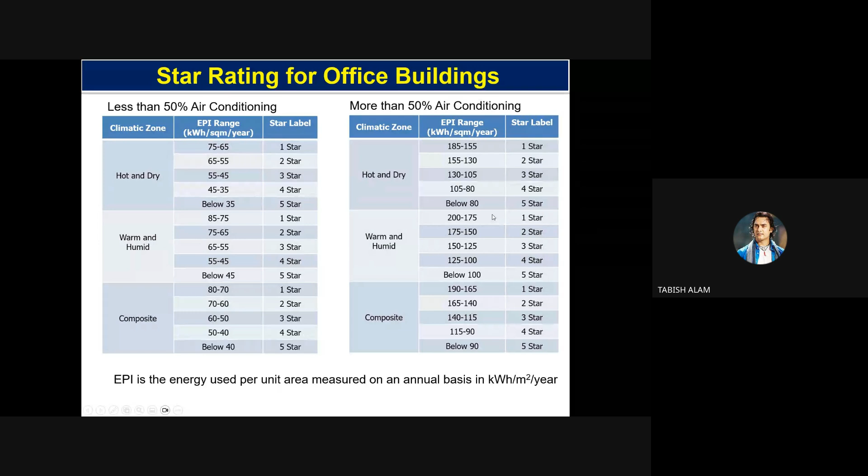This is the effect of air conditioning. So in this way we can see the effect of air conditioning on energy consumption. This star rating is for the BPO building.

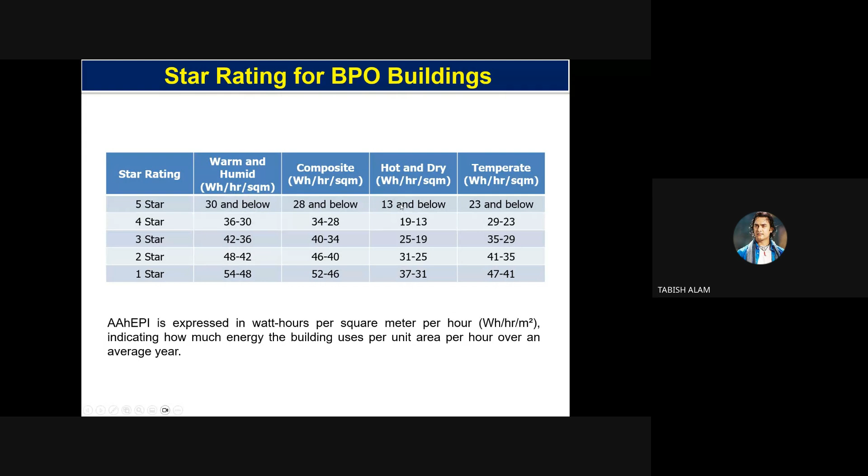You can see 5 star rating for the warm humid climate when the EPI is less than 30. For composite, it should be less than 28. For hot and dry, it should be less than 13. And for temperate, it should be less than 23.

In India, there are a number of green buildings, net zero buildings, that have been designed and are operating in different parts of the country. These are a few examples. One is Indira Paryavaran Bhawan, located in Delhi. This is a G+7 story building with three basements. It is a net zero building.

There are a number of technologies installed in this building, including rooftop solar PV. The total area taken by the solar panel is 4,600 square meters, with an annual energy requirement and generation of 14 lakh kilowatt-hour units for this building.

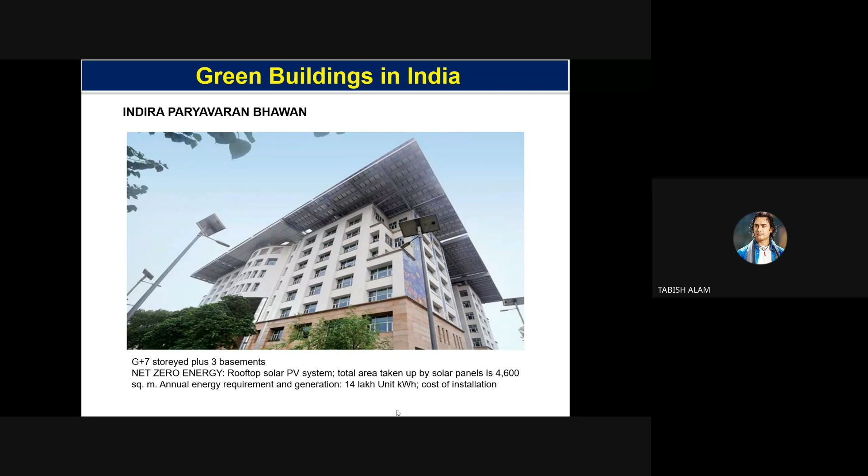The other building is Godrej Plant 13 annexe. This is one of the green buildings that consumes 45% less energy from its projected EPI.

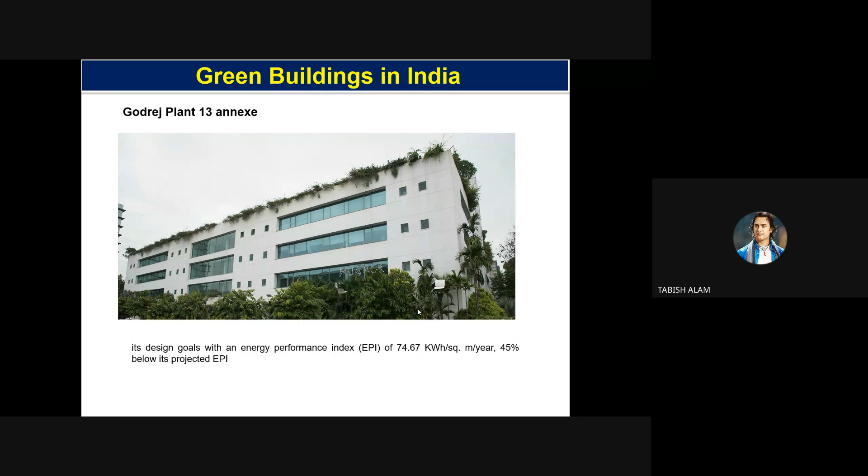So these are a few applications of how we can design a green building. We can see in the whole presentation that first we have to consider the passive parameters, where we can use the orientation of the building, building form, and thermal mass. Up to 40% of the energy of the building can be reduced only by passive measures.

The remaining 60% of the energy consumed can be utilized with energy sources that can be created within the building.